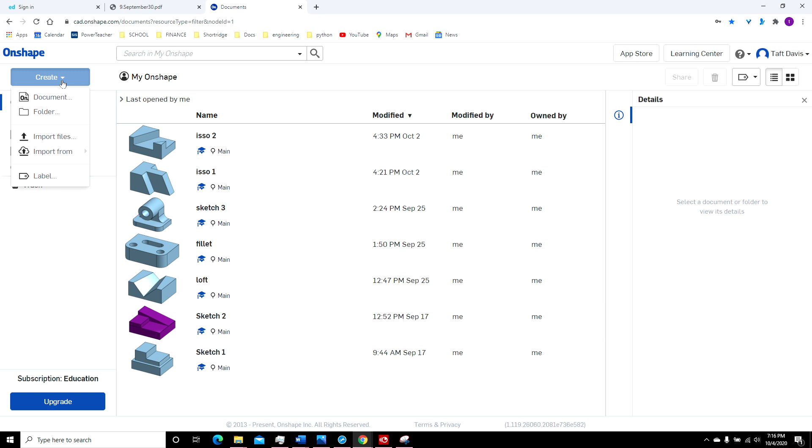All right, before we start on shape 3, I want to organize things a little bit because it's going to start getting a little bit crowded on this first page. So I'm going to click Create, and this time I'm going to click on Folder. I'm going to call this Isso's, and you can call it whatever you'd like to. I'm going to put all my ISOs in this folder, and I can actually drag these two that I've already done and put those in the folder.

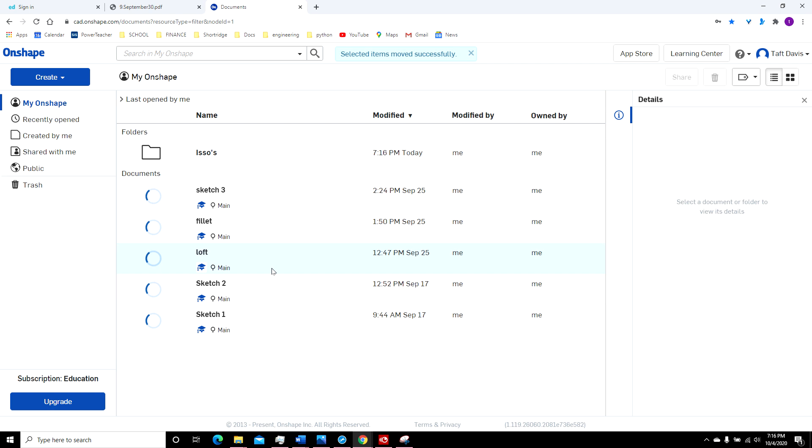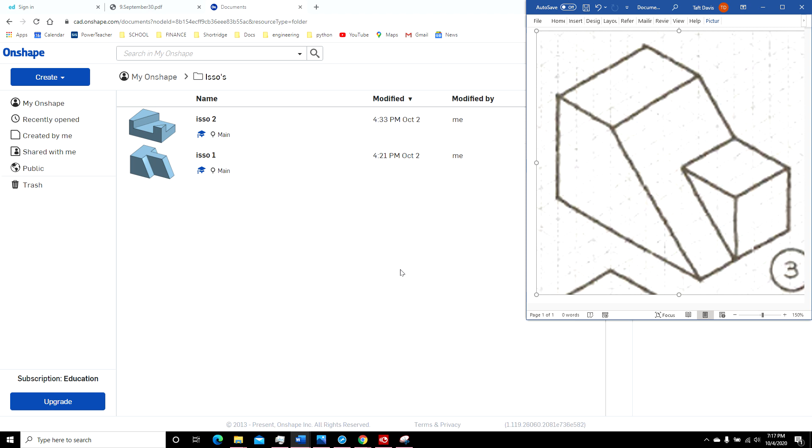All right, now I'm going to open my folder and let's take a look at shape number 3. All right, the first thing I'm going to do is the face of the shape right here and extrude it. Okay, so this is 1, 2, 3, 4, 5, 6, 7, 8 inches long across the base, and 1, 2, 3, 4, 5, and then 3 across the top. All right, let's see if I can remember those numbers.

So here I'm going to create a document. I'm going to call it isso 3. I'm going to work on the front plane.

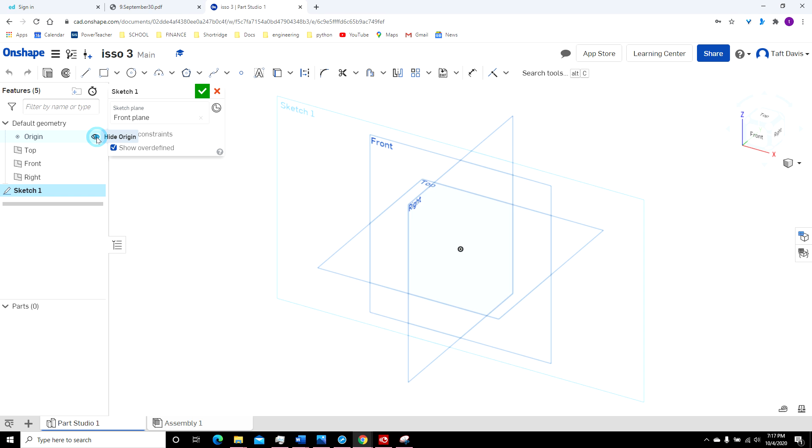Okay, and I want to just click on the front on this box just so that I'm looking straight at it. I'm going to click on the line, come down here, I want to left click. Come over, I'm going to click again and type in 8 and hit enter.

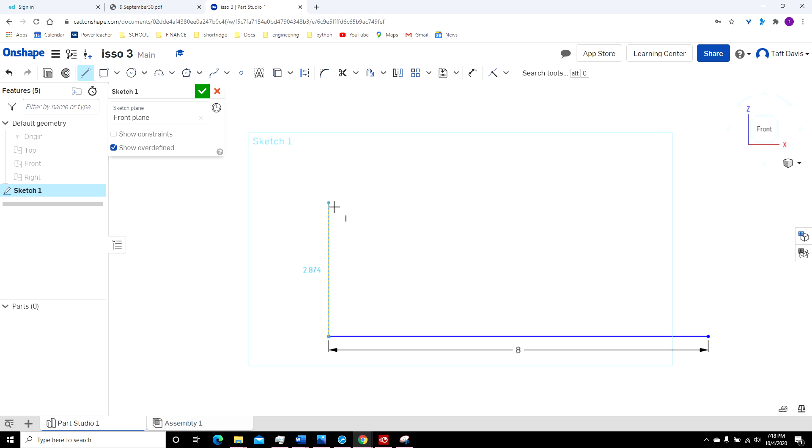Okay, now I'm going to go up, and I don't even have to click because it's going to stay connected until I complete the shape. I'm going to left click. Goes 5 inches high.

And I'm looking to get the green line with the dotted blue line in it, and that tells me that I'm either vertical or horizontal. Okay, you can see if I come off this, then it turns solid blue, so I want to make sure that I'm completely horizontal on each of these.

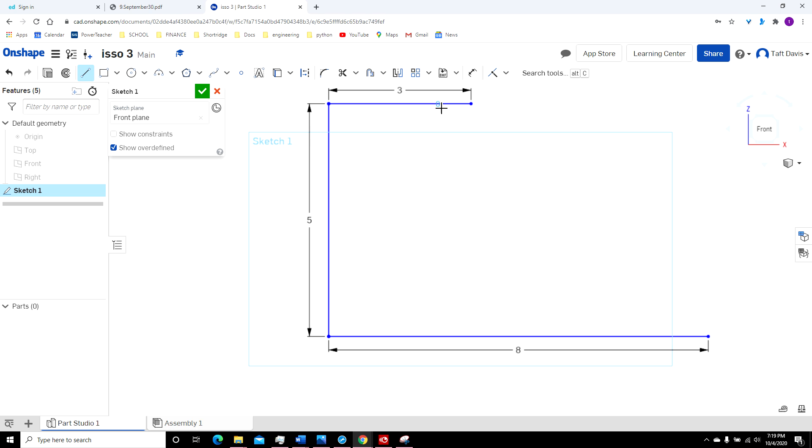This one was, so I'm going to left click, type in 3. And then I'm going to come down and connect.

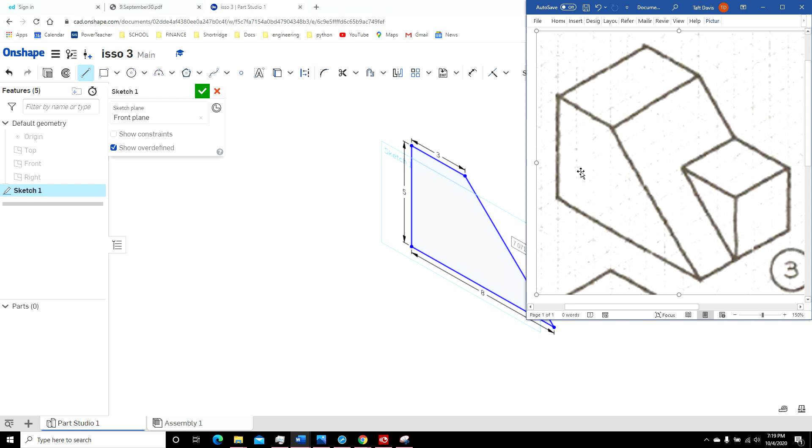Now I'm going to change my view to isometric, just so I can see it when I extrude it. Now I'm extrude it 1, 2, 3, 4, 5 inches. I'm going to click on extrude, change that 1 inch to a 5, and I'm finished with that.

All right, now I need to put that little box on the front. And so I'm actually going to click on the plane button right here. It's kind of right next to that little coil looking thing, more toward the right side. So I'm going to click on that.

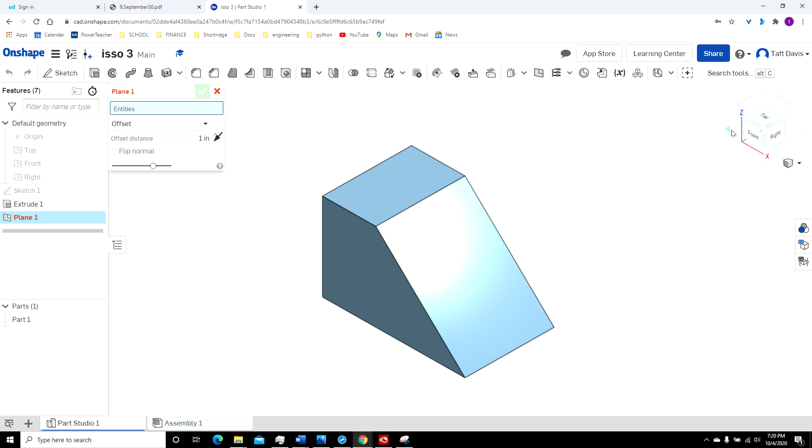Now I'm going to rotate my shape around and click on the back. All right. Now I want to move this plane toward the front. And if you look right here, you can see how far we've moved the plane. I know that base is 8 inches long, so I'm going to type in 8.

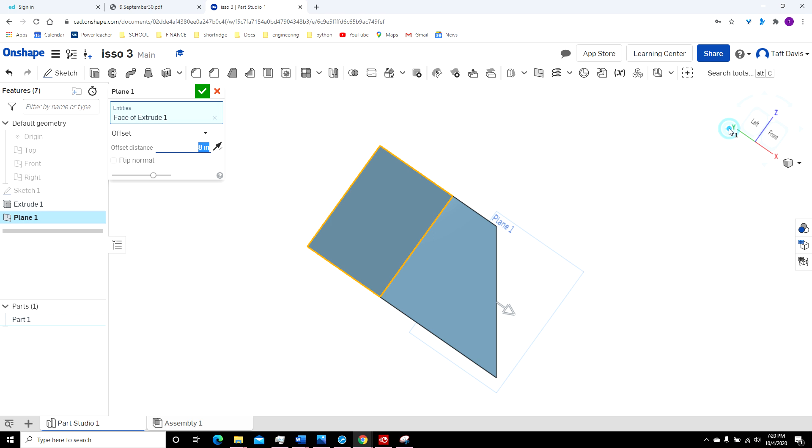And that's going to move the plane. I'm going to click on this right up here on the front edge. Because if we look at our shape right here, we can see that we've got this 3 by 3 square right on the front edge, and then we extrude it back into the shape.

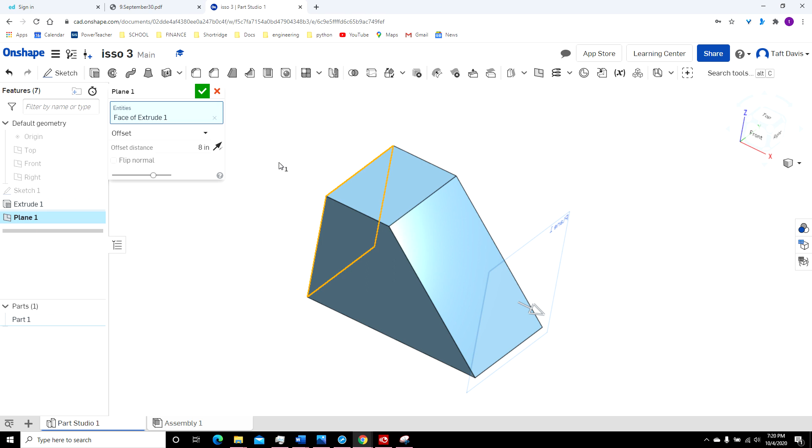Okay, so now I'm going to click on the right side because this was to the right. So I'm looking directly at it, it looks like the flat surface. But if I rotate around, you can see that we're actually on the right side.

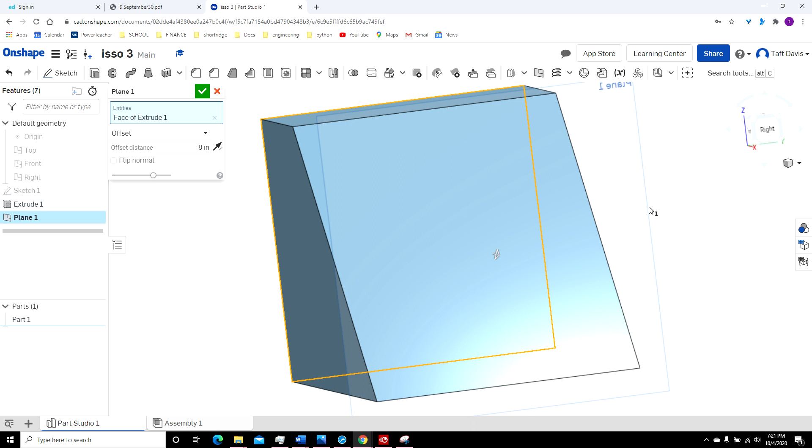I'm going to come over here. Click OK. Now I'm going to do a sketch on that plane that I just created.

Okay, so you can see that I'm right on that plane that I just created. And here I want to do the rectangle with corners, with the corners. Okay, so I want to do the corner rectangle. So I'm going to click there.

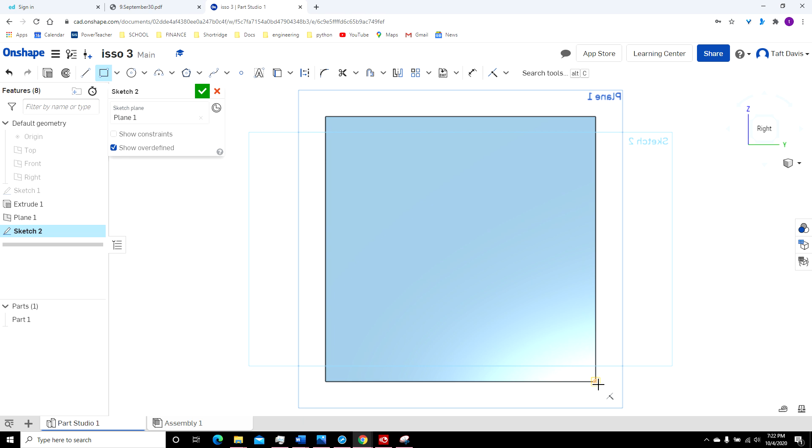And I want to come right down here on the corner of my shape. I'm going to left click and drag out. Type in 3, enter, 3, enter.

Okay, I'm going to come back over here. Click on the isometric view. Now I want to extrude it back into the original shape that I did.

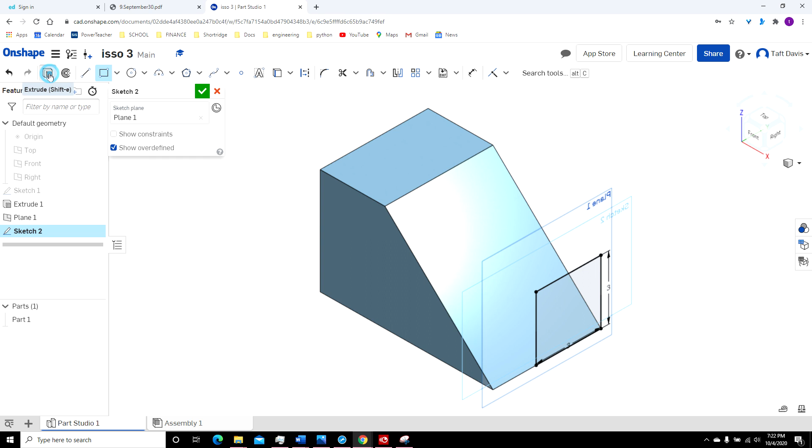So I'm going to click right here. And I can type in here or just grab my arrow and drag it back until I can see this line right here, okay?

You see, we can just move it. And it doesn't matter if I move it too far back. As long as I don't move it all the way out the back of the shape, that's okay.

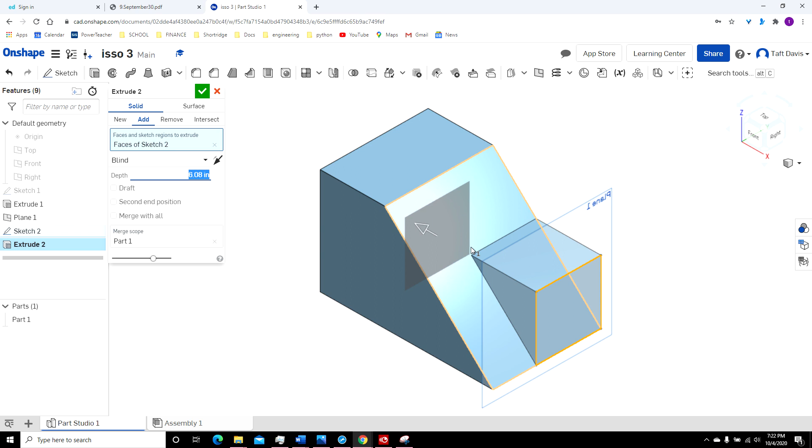Finished. I'll hide that plane. Click on the isometric. Move this over here.

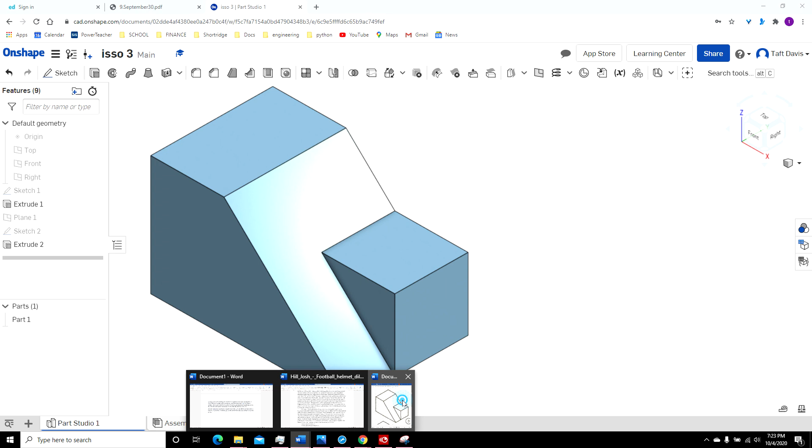And that's it. That's not the only way of doing it. That's just the way that I chose.